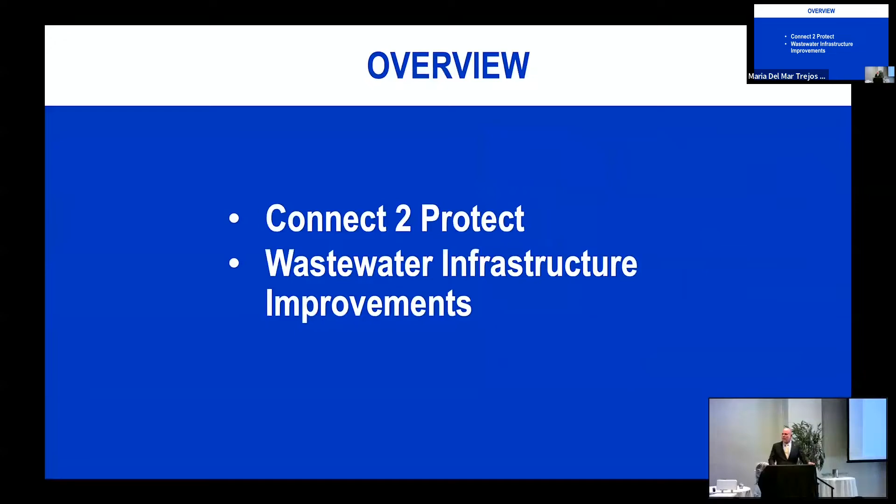Okay, so we will see if I've got this ready to go. So today I want to talk to you about two subjects: connect to protect, which is what we're calling septic to sewer. So you will not hear our group refer to the conversion as septic to sewer going forward. Everything's connect to protect. I'm also going to give you a little bit of information of what we're doing today and going forward in overall wastewater infrastructure improvements.

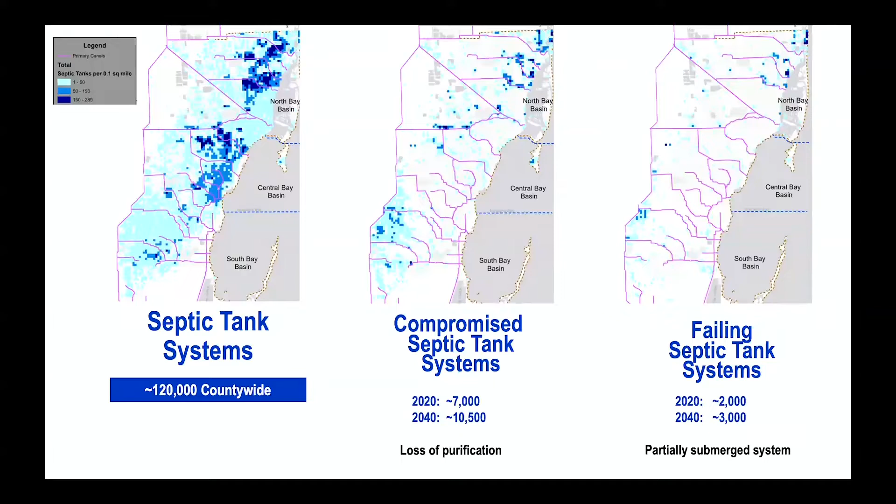When you move to the graph all the way to the right, you'll see failing septic tanks. Again, the colors are the same philosophy: the darker the color, the higher the concentration of failing septic tanks, the lighter the color, the lesser concentration. As of 2020, we have identified 2,000 failing septic tanks in Miami-Dade County, and by 2040, we expect that number to rise to 3,000.

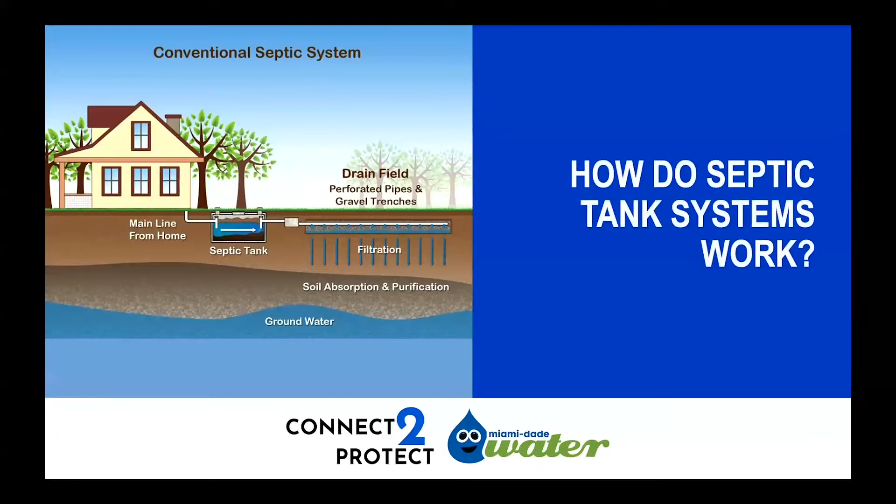So here is a septic system as it should be, and I'm going to call your attention to a couple of important details that'll matter going forward. You see the house and the septic tank, you see the septic tank drain field, and the area below the drain field is the area I want to call your attention to. The filtration area, as you see it identified, and the soil absorption and purification, looking at that in relation to the water, the groundwater levels.

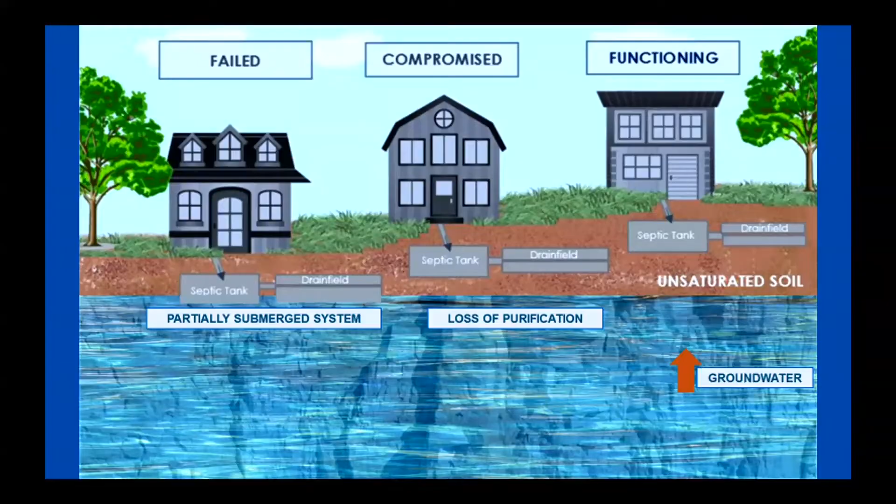So what are the benefits of connecting septic tanks to the sewer system?

The first thing is, and I can share with you some stories in the county, we actually have people who, when it rains, cannot use their indoor plumbing. Their showers don't work, their toilets don't work, their washing machines don't work. When the rain starts, they have to stop water use.

So your number one benefit of connecting to the system is you end any potential sewer backups and damage to your home. You don't have wastewater in your yard. You don't have that health condition of having waste just laying in your yard because the system doesn't function. Those are your primary benefits.

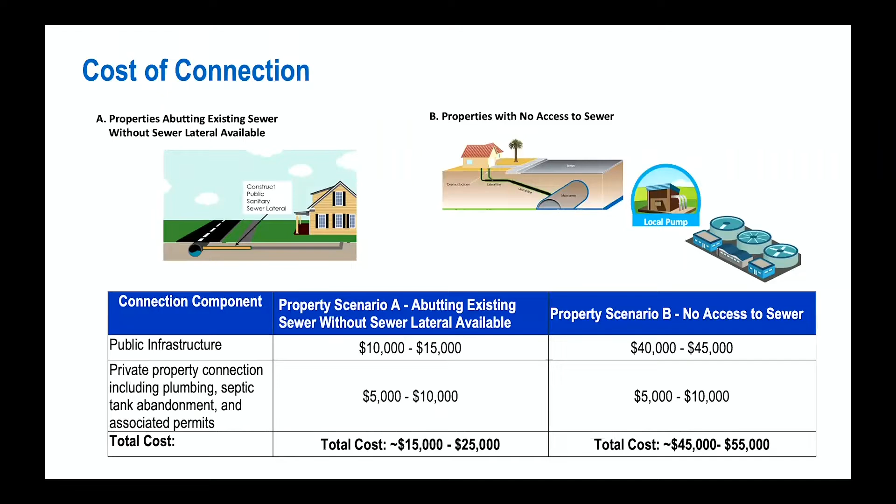So what has been done so far? Over the past years, Miami-Dade County has done an amazing job assessing all of this information, condensed from years of study. It's been an amazing accomplishment for our county to know this—we know where our septic tanks are, we know what their conditions are, and we know what we need to do. That is primarily what has happened over the past few years.

So here's what we're doing now. This is our execution path of getting these jobs done. You can see we're implementing expansions—we are now designing sewer infrastructure for those areas we've identified as needing it. We're designing it, we're installing it, folks are going to work. You can see how we're moving this forward now. We have $150 million in projects underway today.

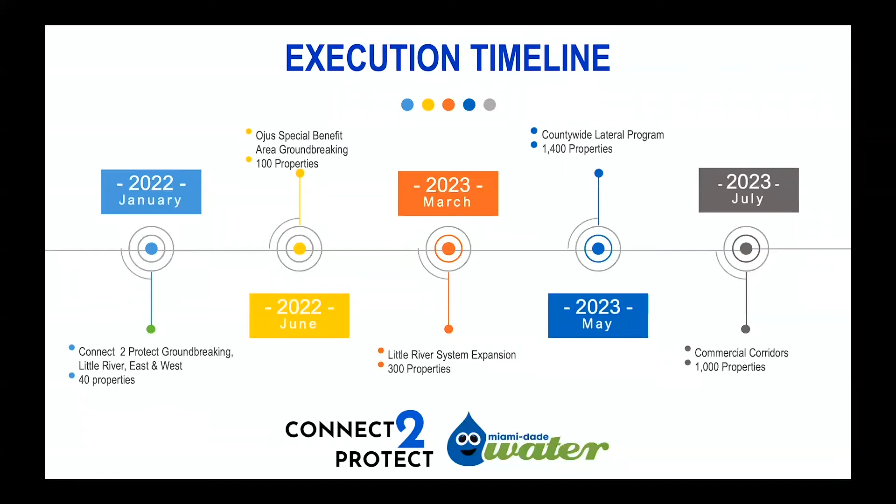In June of this year, we intend to break ground on the Ojus Special Benefit Area, another Connect to Protect project. We're going to have another section in Little River starting in March of 2023. Then in May of 23, a countywide lateral program for areas that have infrastructure in the street but no laterals to connect to—we'll be breaking ground on those in May. And in July, commercial corridor projects for another 1,000 properties.

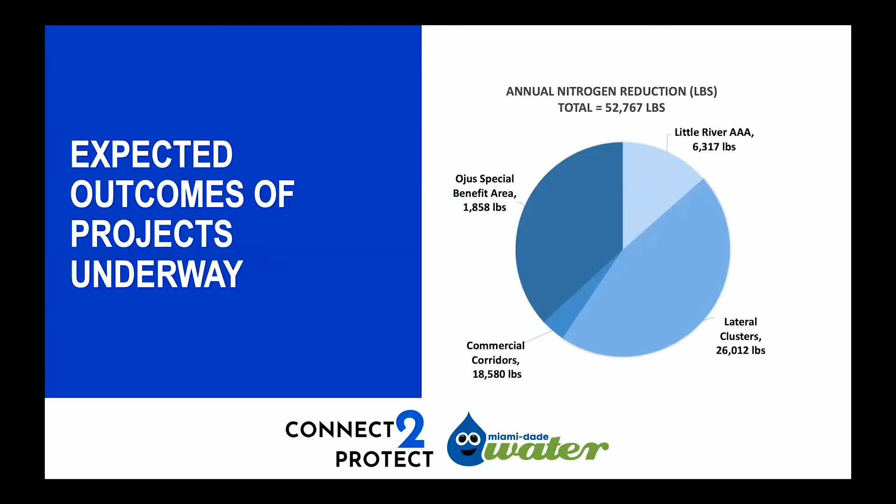So these are the benefits of the projects we have underway. As we all know, Biscayne Bay's health has been in decline, and it's been identified that nutrients are a significant portion of the cause. The projects I've laid out for you today will reduce nitrogen specifically by 52,000 pounds a year from entering our water table and ultimately our nearshore waters.

Future phases of Connect to Protect: the top line is phase 2, about $500 million worth of projects that are currently unfunded. That's intended to connect all of the vulnerable properties we've identified. The third phase would cover the remaining 90,000 properties in the county, a $4 billion price tag with about a 30-year implementation phase once the money's identified.

Below that you can see the sources of funding we're able to use. One thing I'll point out is that the rates our customers currently pay for water and sewer—we are not permitted to use those revenue streams to expand the system for future users. Future users have to be paid for either by themselves or by some other funding source, like general obligation bonds or special taxing districts.

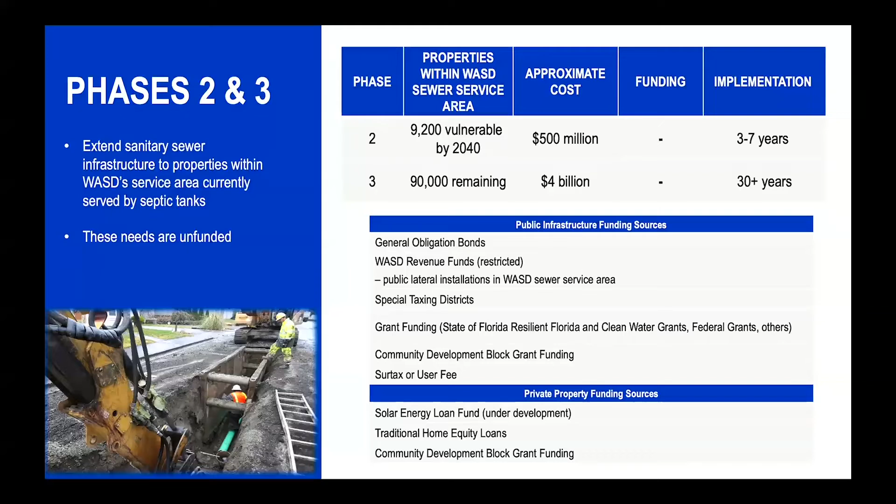I had the pleasure and honor to join the mayor in Washington, D.C., meeting with the administration on how best to seek this money and be successful with it. We've also worked with our state partners—representatives, senators, and the governor's administration—to best position ourselves for state funding.

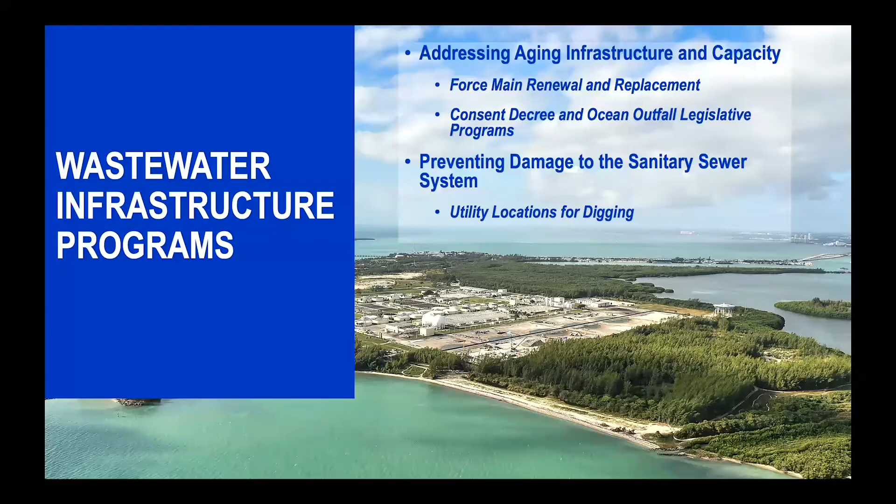With the exception of a couple of anomaly years, we're trending in the right direction. Now, we believe 2020 was a really bad year for sewer overflows, and we've tied many of those to a couple of big rain events. There were a couple of large storm events that flooded big areas of the county, and a number of sewer overflows that drove that number. Overall, the infrastructure improvements we're making are working. It's encouraging, and we want to accelerate those projects to further reduce sanitary sewer overflows.

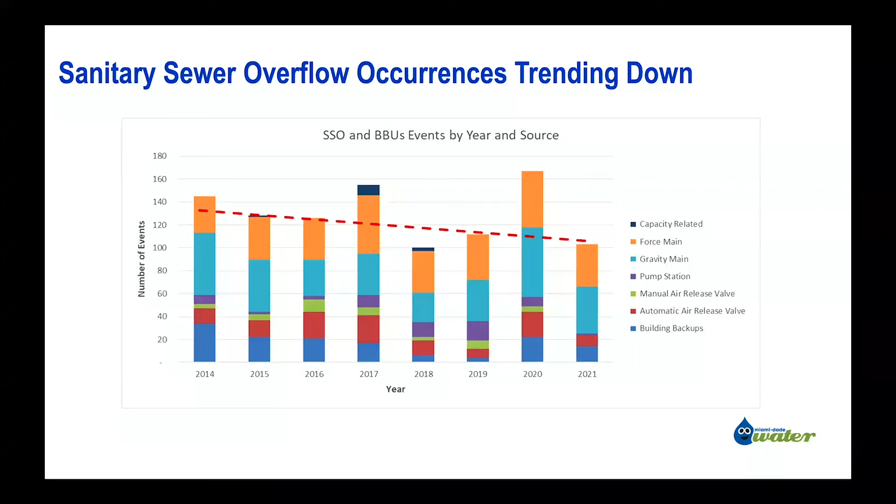This graph is identifying the large diameter sewer force mains - the 36-inch diameter mains in this county that are 40 years or older, which we've determined must be replaced to reduce the likelihood of rupture that would cause large volumes of sanitary sewer overflows. On the left is the entire county, and on the right you see one specific area. Where you see yellow, those are large diameter sewer lines that are 40 to 49 years old. Red is between 50 and 59, and a few you'll see as purple are more than 70 years old.

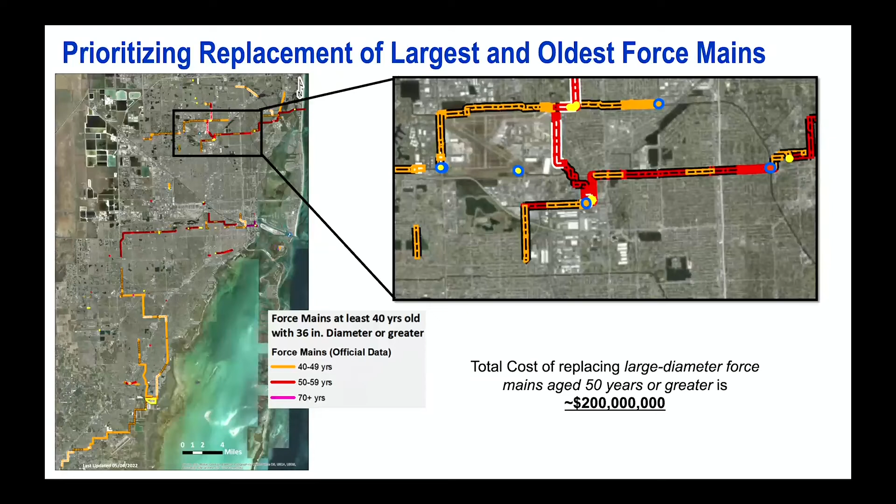What I can tell you is that we're taking a very aggressive approach. Some of these are under design now. The ones not currently under design, we have outside expert consultants that we're negotiating design contracts with now, and they will be tasked very soon so all of these force mains will get replaced.

So I want to talk a little bit about where some of our damages are coming from and what we're doing to prevent it. One of our biggest challenges is contractors in a very busy environment in Miami-Dade County. They're building everything you can think of that's got nothing to do with water and sewer, or they're installing fiber optics or other needed things, and they hit our sewer lines during construction activities - boring, digging, whatever they're doing.

We are required to mark those lines anytime there's construction in the area, and we do that. We mark those lines regularly, as we should, but even with our best efforts, contractors still hit them.

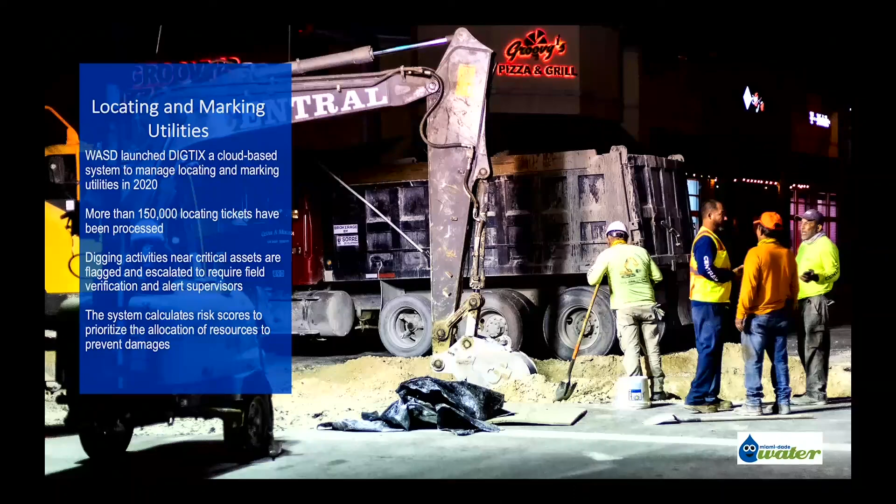So what Miami-Dade County has done is implement a system - the software is called DIGTIX. What it does is place a geo fence, if you will, around all of our critical assets, which in our case are the large diameter sewer lines you saw previously. When we see those large diameter assets where there's a location identified for construction, we send folks there. We go above and beyond to make sure contractors don't hit those lines, and it has already proven we've had fewer hits than in the past.

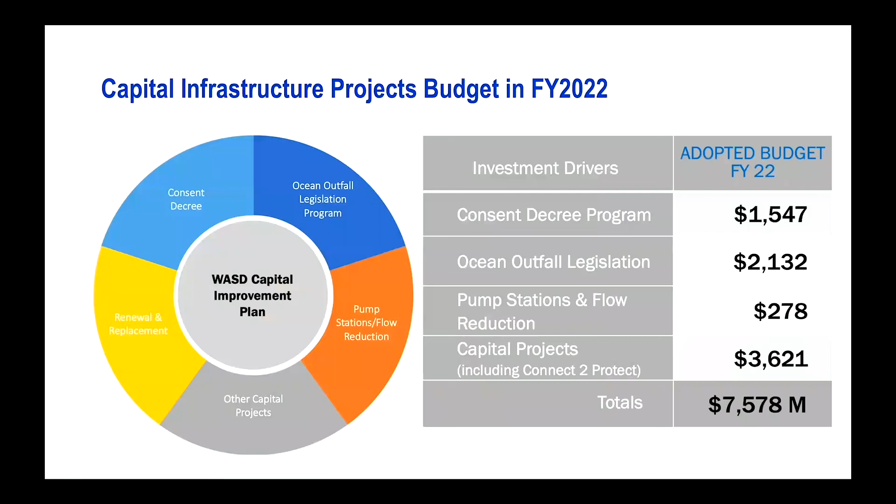Here you just see our budget - what we're working on. We have a $7.5 billion capital budget at the Water and Sewer Department. That's our charge of duty to implement.

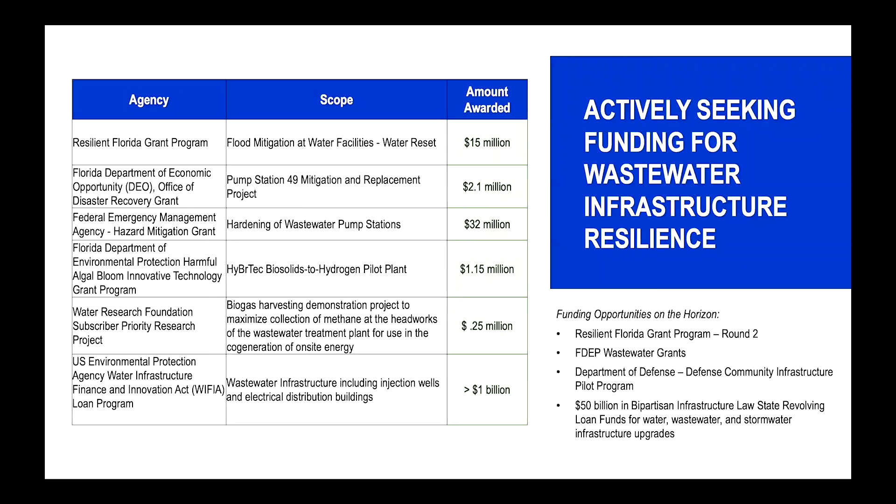Here are some other areas we're seeking funding for. We're chasing grant funding for the overall project, separate from Connect to Protect. You can see what we've already been awarded. The very bottom is WIFIA loans - not grants, but federal government loans that are extremely low interest. Miami-Dade County has over $1 billion worth of those now promised to us to help with that $7.5 billion program.